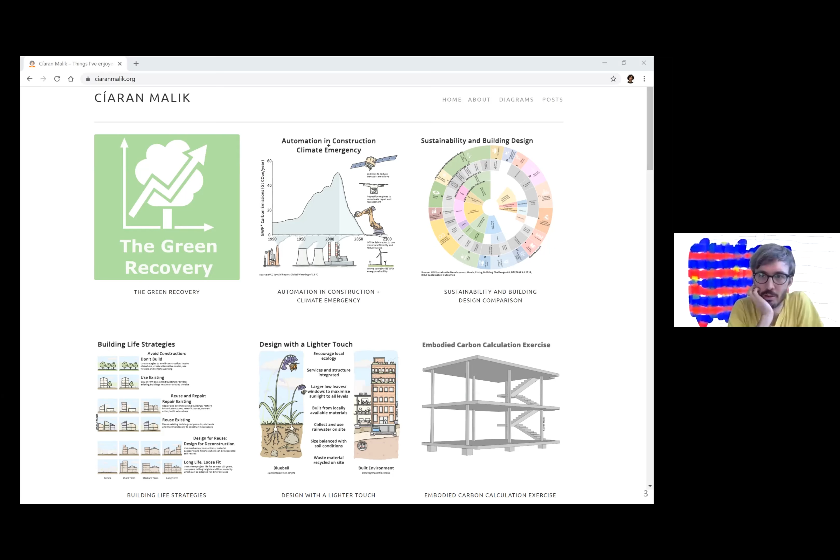So look, I'm glad there's a small group here. We weren't sure if anyone would be here or not, but effectively what we're trying to do - Theo, Astrid and I, who run a firm called APPARATA - we are looking to change and adapt how we work every day, but also how we teach in relation to issues around energy. We recognize that as very much a series of external things that come within the discipline.

Be it regulatory, be it engineering consultation. But we're interested in the idea of what ideas can emanate from the discipline of architecture itself, from either historic figures or historic ways of building and thinking, and how as a discipline we can help form what an emerging architecture might be like.

And the reason to do that - you'll see later, Ciaran will expand on it - is that we've been told by various organizations that we have between 10 and 20 years to radically change how we use energy, which in turn means radically changing how we might think about buildings. We think it's good if that doesn't become just a technical issue, but also a cultural issue - a culture of habits, but also a culture of how things are expressed, look like, and feel like.

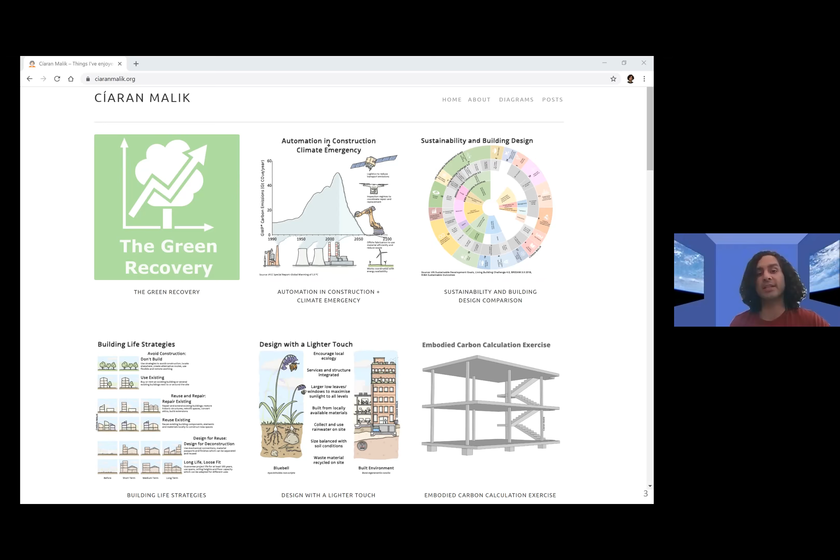But then there's been other work looking at just how do you calculate embodied carbon and the green recovery, and running training courses on that myself. And then the wider context that, well, this is actually, sorry Nick, this is you.

We wanted to say something, it's a bit awkward to do, but we wanted to mix up these things. Typically when we attend talks about sustainability, the topics use the words climate or sustainability, and they're very much facts and figures based. We thought, is it possible to set side by side these facts and figures we need to know, alongside some architectural history, because we're moving through a historical moment.

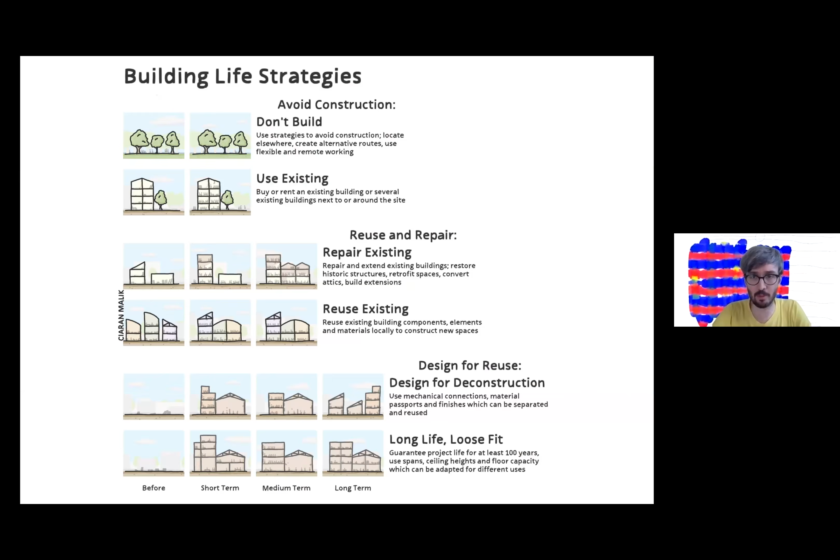It'd be nice if people ask questions through books. I think that'd be nice. That's an interesting way of putting it.

Okay, so one of the things I was trying, in this process of trying to break it down into something understandable, tangible and usable, especially in teaching, was this diagram here, which looks at the different levels or building life strategies we can start to think about. They fit into three main groups: the idea that, although it's not going to be ideal, you can have low intervention and not build, or another option is to use what's already there—again, another way of thinking about not building.

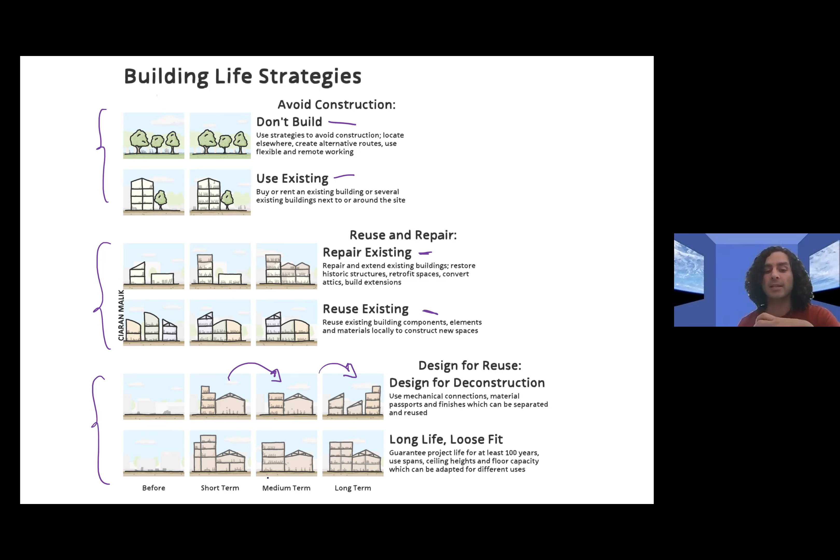Then there's the idea of using what's already there—a building whose life has already begun—do you repair it, or just reuse existing elements from elsewhere? And then you have a much more long-term approach: the idea that you design something that can then be changed in arrangement and changed again, or you design a main part that's firm, and that main part can then be adjusted, and adjusted again.

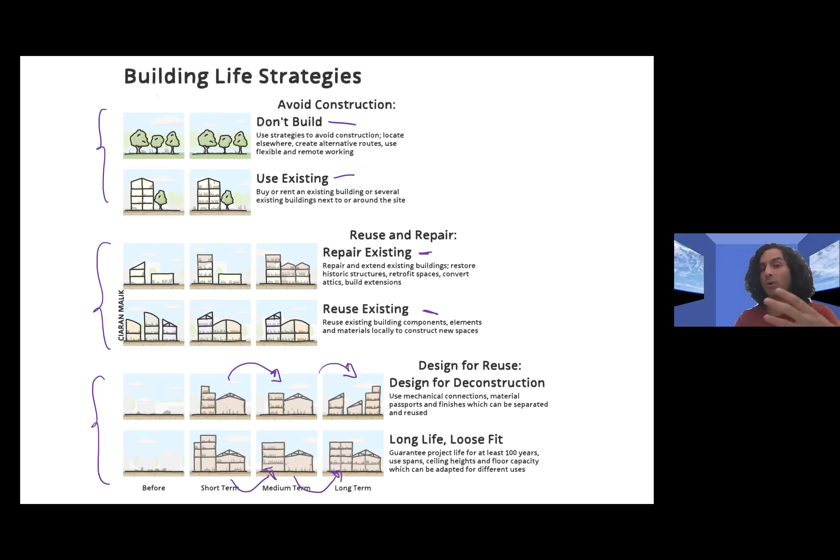This idea, or the change, came from the IPCC report we'll refer to, which warned of the limit we need to hit—1.5 degrees centigrade change in temperature. This adds an urgency to the whole process. In some ways, if buildings have been evolving along different branches, this could indicate a point where there's a complete branch we need to remove from that evolution, because it won't allow us to curb global emissions. The idea is that we're emitting emissions, and that emission rate has been going up, and we need to take as much action as we can to reduce it to zero, or even lower it to a negative value.

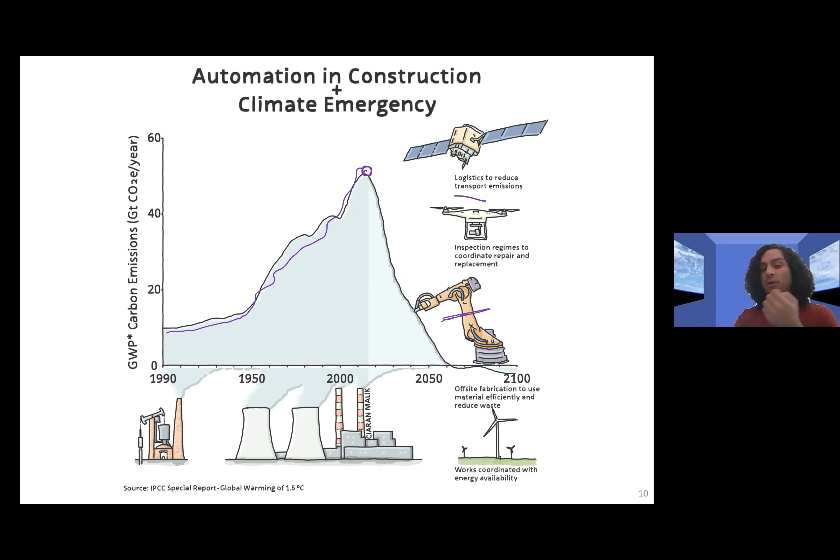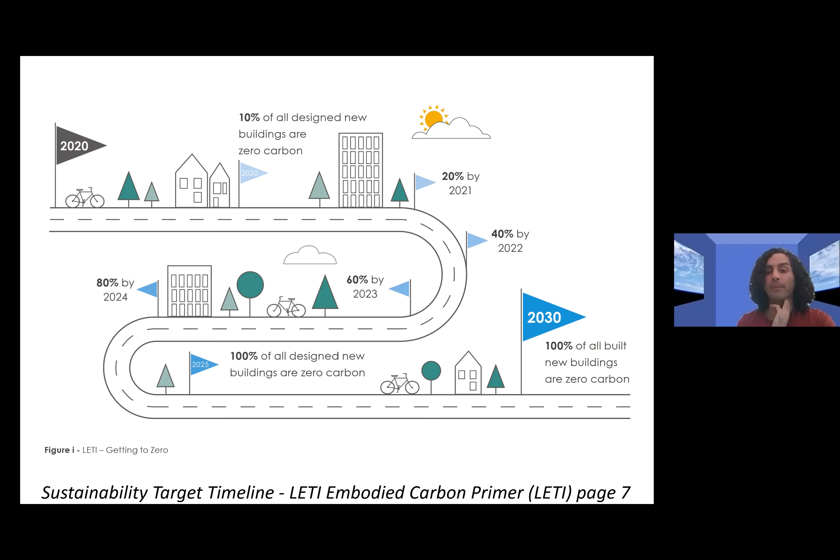And then also to works coordinated with the energy availability. So building at times when possibly there is energy that's not being used on the grid would be another way to do this. And there is a route map or a roadmap to this, and LETI has developed this, and the idea that we're at 2020 now, and the idea of getting to 2030 and getting to zero carbon designs, that process that we should be taking to get there.

And one thing that comes up that I think some people aren't aware of or don't necessarily always consider is the fact that it's been shown that 80% of the buildings that we're going to be using in 2050, when we're meant to hit this zero carbon point, have already been built. So although we can start to think about this in terms of new buildings, we really, in the teaching and in our work, need to be thinking about that 80% that already exists, that we're going to have to start adapting and changing.

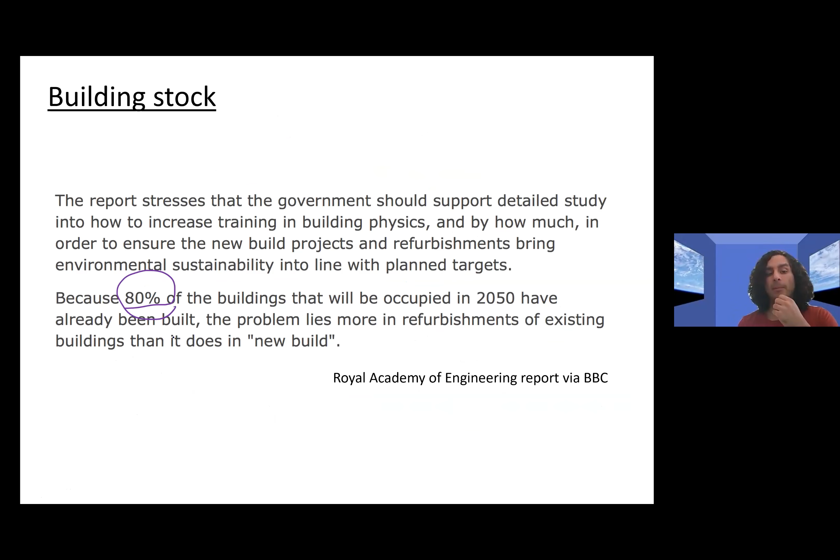So we're going to be intervening in the middle of the building's life. And this image comes from one of Nick's projects, and to me, I think this was a really interesting part of seeing Nick's work, and this is kind of one of the points that we started to work together, is that this is from a refurbishment, from a reuse building. So they're reusing the existing building. So you've got the existing masonry here. You've got these radiators, which I suspect you've got iron pipes.

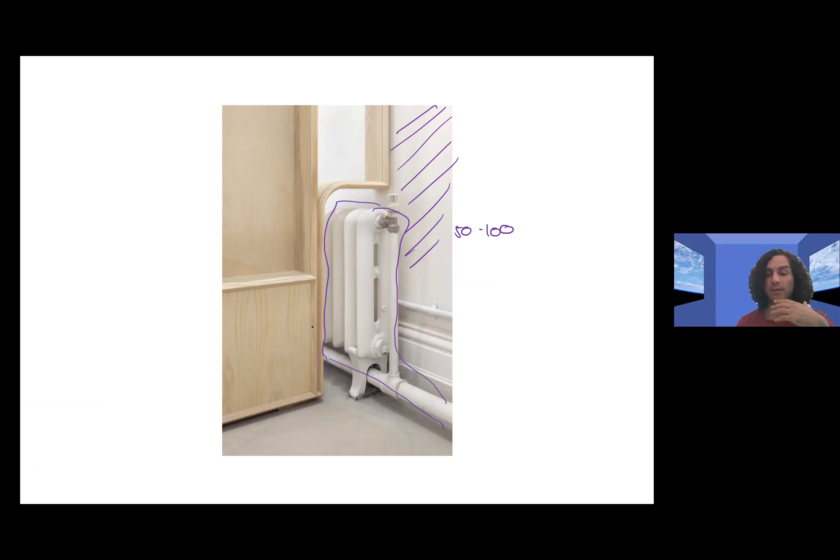So you have this building that has already had a lifetime of say 50 to 100 years, and you're trying to reuse that space. And so one option would be that if you had these partitions, you might try to move those, undo those pipes and change them and move them along. But what I think was really nice about this and seeing in their work was that they had actually chosen to just completely go around it, that they acknowledged that their partition would not have the same life as the rest of the building.

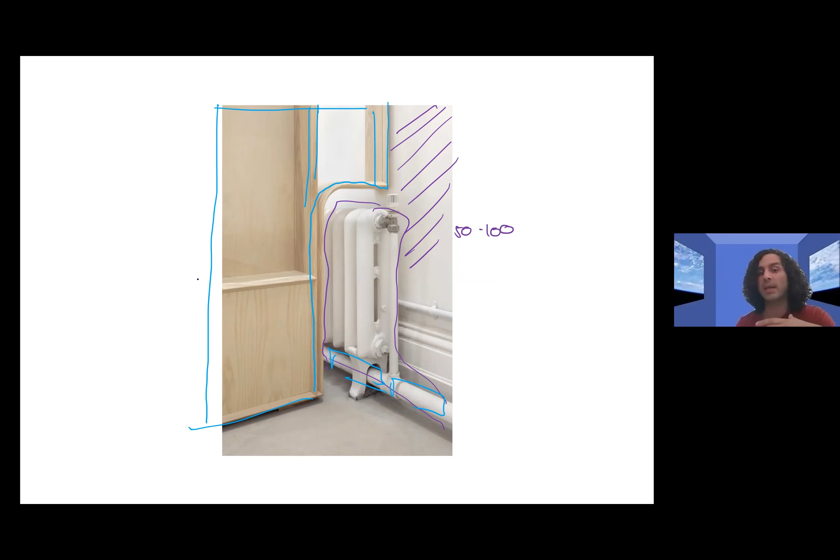And so they made this active choice to do that, which I think is really interesting. And then the other part was that they chose the materials for this frame and the assembly of this frame in a way that it could be moved. So it itself would have a reuse, or it could be adjusted within the space, and that it could be disassembled and hopefully the materials recycled and reused in another way. So it's what I really liked about Nick's work and Apparatus' work as a whole.

Sorry, just to be correct.

So we're going to show 4 little stories from different projects. 3 of them are reuses, and 1 is a new build that we'll end on.

I just want to highlight something that Ciaran said a second ago. He was highlighting the IPCC report. But just to say that's really, really important, because there's very much a before and after that report. The reason why Extinction Rebellion and all these other things seem to suddenly become much more present again is very much to do with that report. So we could say that there's human knowledge about what's going on with our environment before that report and after that report, which is why things designed before that report are going to be different from what's designed afterwards.

So anyway, just to say something, we also wanted to get this conversation going, hopefully with others. So Ciaran said something about our work, but I can say this is one of Ciaran's drawings, and we were completely intrigued by it because, of course, this is not as an architect how you think about material.

So it's quite challenging in a sense, where material doesn't just have a kind of perceived temperature or construction potential. It actually has a number attached to it, and that number is a thing that you can spend and save, and we're supposed to save as much as possible and balance it out. It gives a very strange and challenging reframing of how you might think about materials.

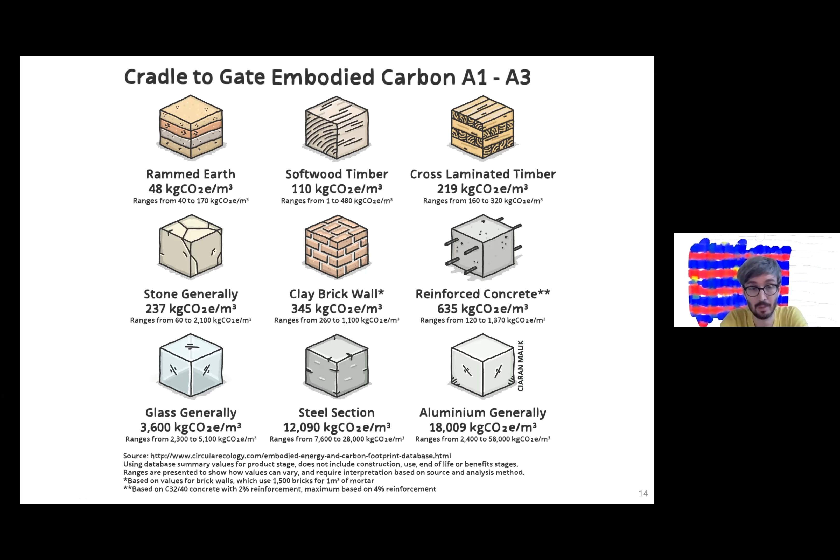The council had suggested injecting chemicals into the wall at a low level to make a new kind of barrier, and it cost about £30,000. That would have meant the project would have died. Also, that technology fails every five years, it doesn't actually solve the problem, it just maintains it, and it's a very common building approach in the UK, which is symbolic of some of the issues we're going to have adapting existing buildings.

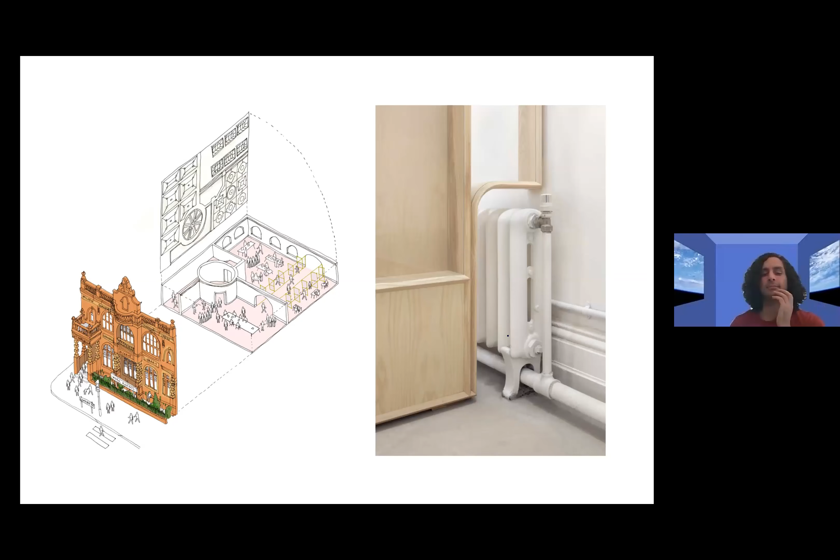So the second story, this is Old Manor Park Library, an old Passmore Edwards library in Newham that had stopped being used for about 10 years. The council felt they couldn't maintain it—they couldn't identify where the leaks are or where the electrics might be. They had plastic pipes hanging from the ceiling, and the building had become a collage of short-term maintenance solutions with no knowledge of previous ones, because there wasn't an ongoing logbook or drawing set. It became a victim of maintenance fail.

So this project, we were asked to help turn it into a public hall again at the front, and a series of private studios at the back that would be involved in delivering the public hall at the front.

To do the project, we stripped it back just to reveal all the problems and said, look, we're going to make good in certain parts, we're not in others. But the main point is that you will see leaks and things appear, but at least we now know where they are, and we can manage the longer life of the building more clearly. We inserted a series of ash and glass partitions—other than say we wanted to make a hierarchy between new and historic, a cultural play between clashes of new and old things, while making very clear what the hierarchy is.

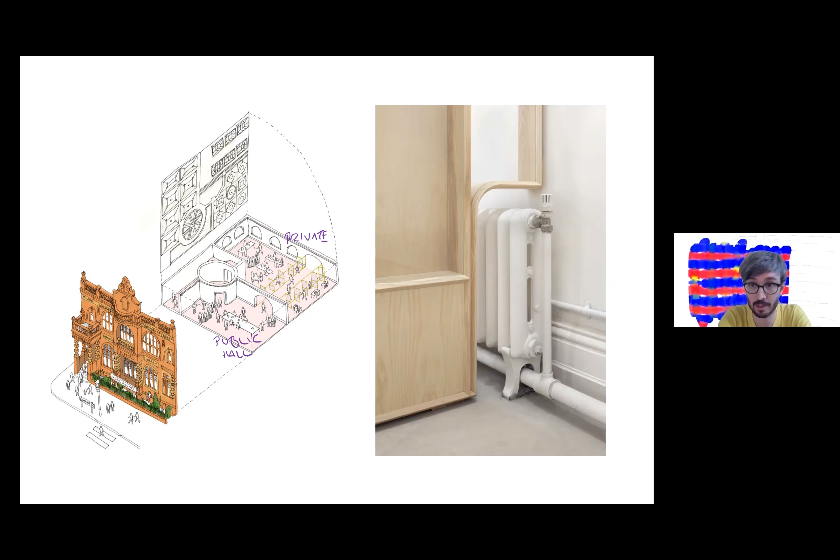Should we move on? Yeah. Mm-hmm. So this was something.

What's really interesting is when you overlap some of these timelines—for example, the liability that comes with that design is something like 7 years. So you've got a period for the liability of that project. How responsible is the design team and everyone involved for that?

You have other problems too—for example, policy at the start of that design period might change in a 4 to 8 year period. You've got the ownership of that property as well, so you might have a project that completes and is only owned for about 10 years—so, ownership.

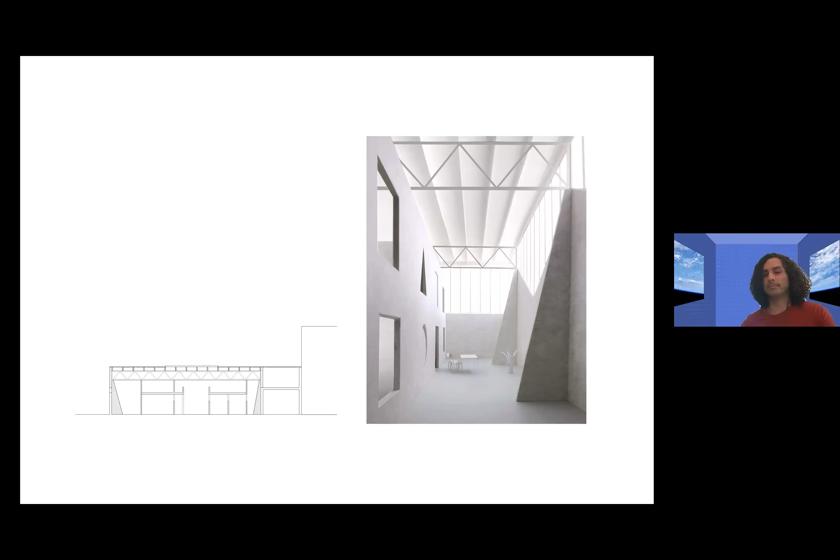Just to go back to the last slide, we find that a very promising basis to develop future projects off, because, well, we'll come back to that at the end, but we think this is sort of straightforward on the surface. It's quite straightforward thinking like this, but actually, if you play it through, it radically changes what one has to do. Okay, let's go to the next slide.

So we have two more little stories. We'll try and speed up. So this was a project that we're not doing, unfortunately, but it was to work with an

And our view was that they had this existing two single-story sheds, which you can see in the image on the right, these kind of pitched roofs that weren't quite big enough for what they wanted.

But we thought a kind of light touch would be not to knock the building down, but to keep it and to place a new lighter roof on top of the pitches to make a single space, and then add buttresses to help stabilize those walls.

And what this would mean is that you wouldn't have to build any foundations, which are quite serious things to do. This was actually a very tight London spot, but also in terms of cost and end use. So the foundations are all above ground effectively.

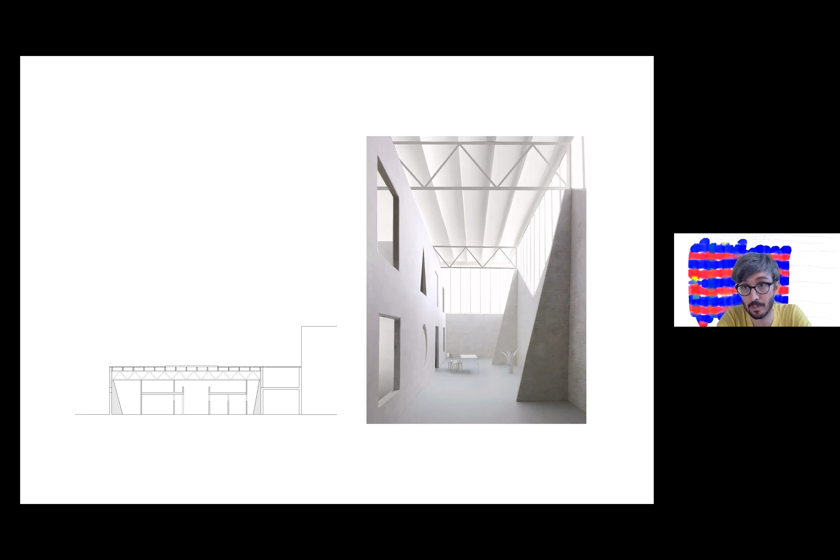Can we carry on? Yeah. So then this comes back to something that we've been talking about before, that we're aware that a large amount, at least in London, and at least for just the first kind of stages of our buildings, that a large amount of the carbon that's in our buildings is actually buried beneath the ground.

So we throw a lot of material, we may choose to build tall buildings on very weak soil, and so then we end up having to use 20 to 30%, like the carbon of the whole project would just be in the foundations. And a better strategy would be to acknowledge where we have weak soil and to build shallower, or if we have strong soil, it would be to build taller.

And I think this needs to become a more normal part of the design process. So the initial response might be that this data is hard to get a hold of, but the British Geological Survey hosts their borehole logs on their website. So for most, at least in London, you're only ever about 20 to 30 meters away from a borehole log for your site.

So you could easily identify your site, easily identify a borehole log on one side of it, on the other side, and understand your soil, and then be able to plan the intervention, your architecture above ground, and take that into account as part of that process.

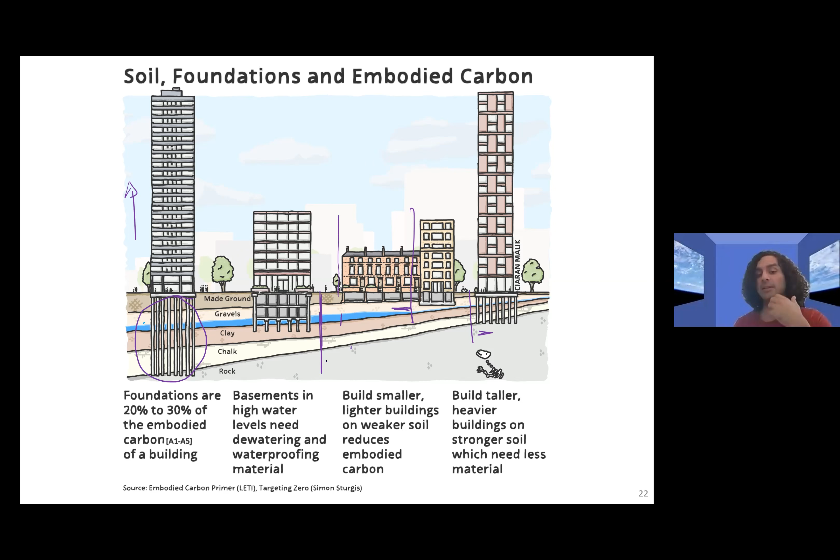And then the last story, this is the only new build, whereas Kim was pointing out earlier, 75 to 80% of buildings that will exist at the end of this 30-year climate adjustment period will already exist, and only 20-25% will be new. So this is the one we were including from our set of four.

This is a new build that's just started on site now. It's a housing project called House for Artists for London Borough of Barking and Dagenham and the Greater London Authority, working with Cradle London. It creates a series of hyper-adaptable flats which aren't based around corridors and a public ground floor.

The reason to show this one is the materiality, but here we wanted to make sure there's adaptability built in, meaning you have a sparse structure on the inside and a series of soft infill walls, so you can easily change the building's layout, even to an entirely different function should it not want to be housing in 50, 60 years. Whilst it is housing, you can add and subtract rooms from one apartment to the other, adding walls and compartments without causing a fire issue.

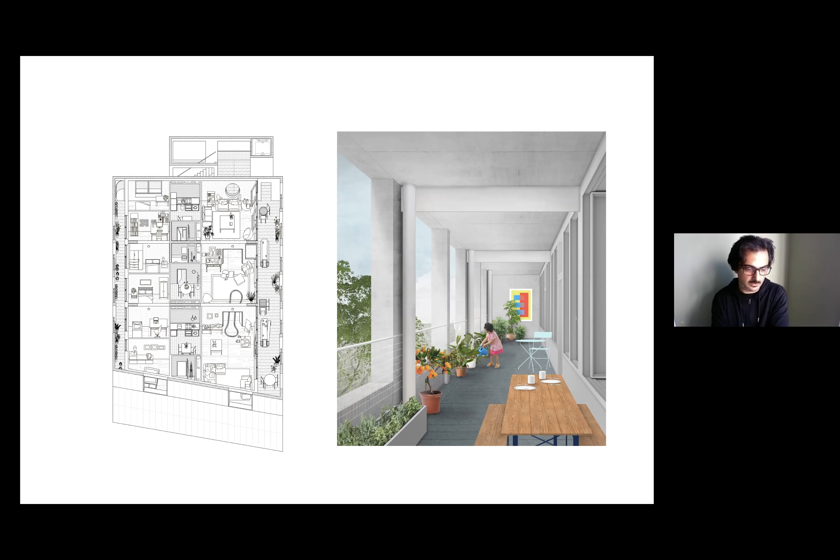I think that's a good point. Just to say, we see architecture as a kind of environmental art, and that's historically what it is—it modulates your environment in a particular way, but historically it also responds so that you don't have to use other technological means to keep cool or have to burn fuel. It might be worth mentioning we work with Expedition Engineering, and also Max Fordham, since we're talking about this.

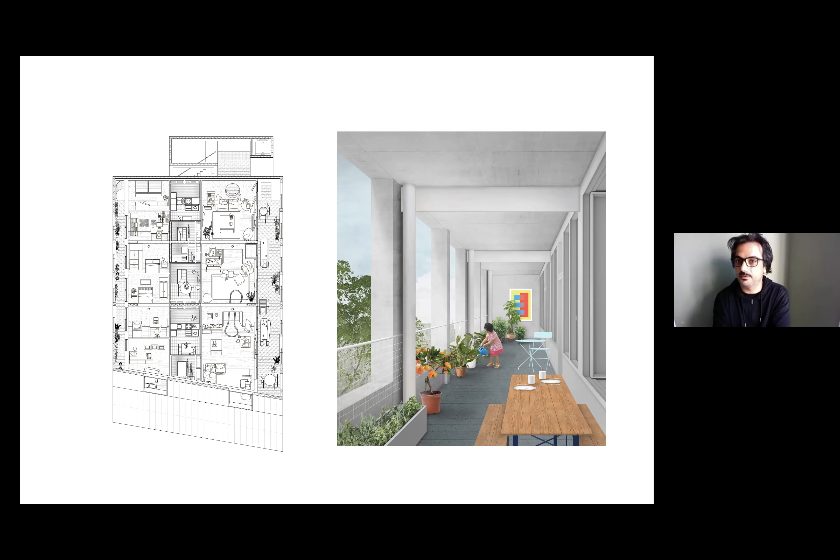Yeah, so should we move on? One of the last things we had was a kind of abstract conversation about what a 100-year life building would look like. I think one of the easiest to think about might be something like the Pantheon, which has already existed for a long time, and essentially acts through a series of adaptations over its lifetime.

So you have a building that can adapt over time to suit new functions. But there are other ways of thinking about that—for example, the Pantheon as one note. Then you might have something that you have to repair, where the individual parts have a much shorter life, but you create a cycle of repair. Something like that might be the Great Mosque of Djenné, a rammed earth structure which is annually repaired using a timber scaffold that allows it to be maintained over its lifetime.

Then you have the idea of this architecture lasting 100 years conceptually. An example might be the Serpentine Pavilion—no single one of those exists for 100 years, but the idea of it exists, and we've seen several buildings on that site achieve the same kind of function.

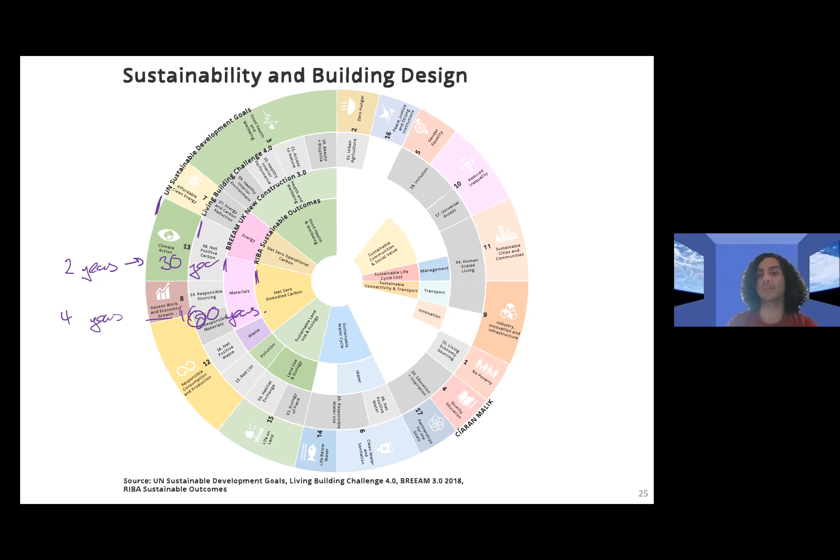So, to go back to Nick's original reading. Nick, go to the next one, sorry.

The reason why we wanted to look at this topic, and were hoping to get a discussion going, is that presently when we design buildings, in industry we automatically think about 50 to 60 years — that's the built-in logic. The building is a kind of consumable product which has to serve certain ends, but has its own demise programmed into it. And if you drill down into why 60 years, it comes down to a relationship between capital costs and maintenance costs and all these kinds of things. So we can't say that the 60 years is to do with sustainability, or that it's to do with architecture. It's to do with a very particular way of seeing the built environment.

So our open question, which we discussed with Ciaran, is: what if we consider why an office building can't be like a tent and last only two years, two months? Or why can't a building be seen to never end, only dying once it's abandoned, so the uses can keep changing but it keeps being maintained? And then it's not just a question of engineering, it's a question of what we're prepared to spend on our buildings, and how we might remodel how we build collectively.